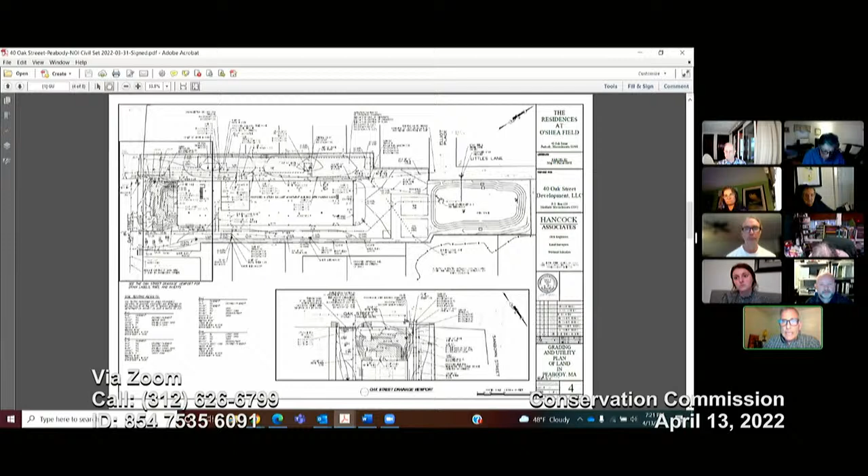Additionally, we have committed to additional flood mitigation, something to add above and beyond what we're required to do and what we previously committed to do with regards to our stormwater system. We're going to cut out this area a little bit, drop the elevation, and tie it into the municipal system so that it could be an additional relief valve—an additional amount of floodwater storage during peak events. So when I get into the stormwater, I'll explain why our system in general is improving the situation, both from the standpoint of stormwater and flood control, and this addition that's new to the project will just go a little bit beyond that.

So we do have a marked reduction in impervious surface on site, and that will assist with recharge, putting water back into the ground. We also are proposing an underground recharge system in the front, under a landscaped area, that will take our roof drainage and try to put that back into the ground also.

So let's talk a little bit about why we're here and the resource area that we trigger need for your approval, and that is bordering land subject to flooding. Again, the base flood elevation per the FEMA mapping is elevation 27.0.

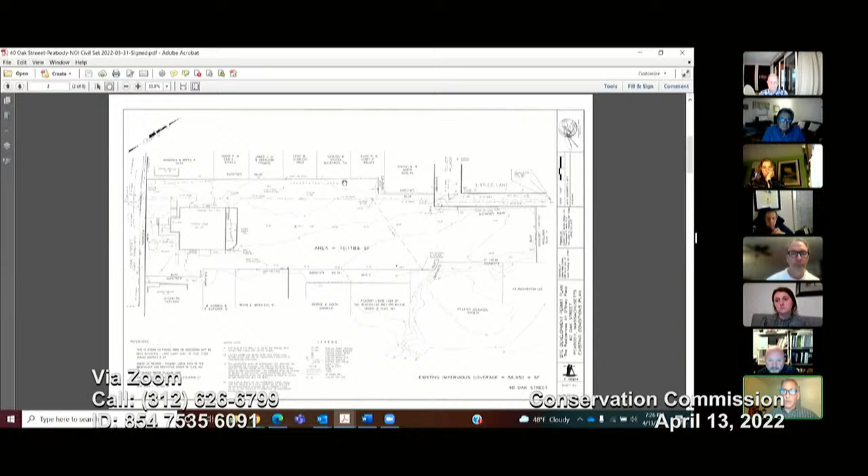So our starting point in doing our stormwater design was to take that volume that happens above the surface and put it below the surface, so that we didn't deprive the municipal system of that storage, because if we did, there'd be more problems downgradient. And on those small storm events that caused this large puddle to happen on the Elks site, that wouldn't happen on our site—we would put that underground and it wouldn't be a nuisance to our residents.

Then from there, we had to add volume to that to handle any attenuation that's required for peak flow from the site. The original piping systems, municipal piping systems and stormwater systems, weren't designed back in the day to the rigors that we're required to. We're required to look at everything up to and including the 100-year storm event.

So our system is designed to do that, so that when we're all done, the amount of water leaving the site and going into the Oak Street system is less, and what happens during these storm events is better for the area. And from the standpoint of our site, we don't have any parking lot nuisance flooding.

So we are making slight grading changes to the parking lot to develop the low points, move them around a little bit. But in total, when we look at compensatory storage incrementally as is required by the wetlands regulations, we don't have—we're not losing any storage volume.

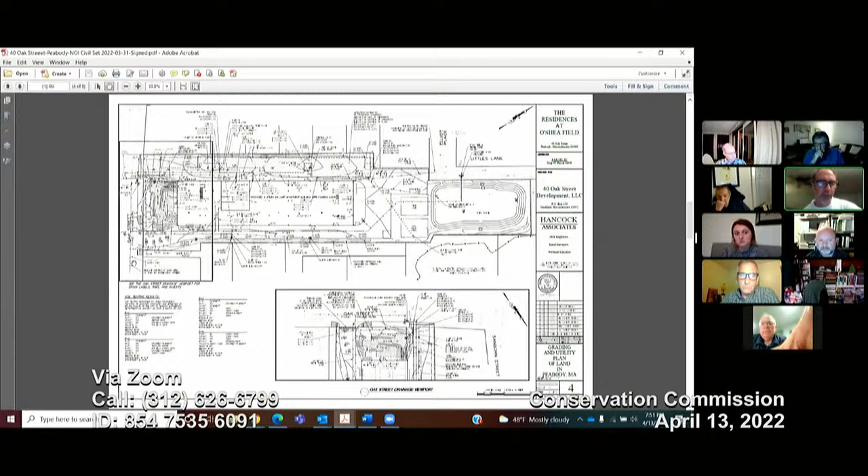Anybody else have comments? I have a couple questions. Go ahead. Just the idea—not so much flood related—but I saw in the beginning from one of your entranceways, it seemed like the most direct route, people always gonna take the straight route, and you have a path, like a switchback kind of path going back and forth because it's not that steep. Is it for handicap accessibility, Mr. Joe, or is it something else?

Yes, so these two sidewalks are under 5%, which is the handicap accessibility requirement for a sidewalk. Then this last section is an actual ADA ramp with rails, which has to be no more than 8% to get up there. And we've got a straight path that uses stairs for those that don't need that.

And you mentioned there's gonna be test holes—not so much test holes, but peak holes, or whatever you call them—within the underground chambers. Is it a sufficient amount that you can see the status of any kind of debris that gets into the stormwater chambers? Yes, there'll be monitoring wells, monitoring points, at the entry where your sediment will kind of be highest.

And when I talk about maintenance, a qualified expert firm that can do these more complex systems, they all have camera systems that you can put down the inspection ports and inspect. Direct feed to a tablet, and they're great to really understand, okay, our sediment load is such that we've got to get a vac truck in here, and the vac truck can go down that same port and suck out the sediment.

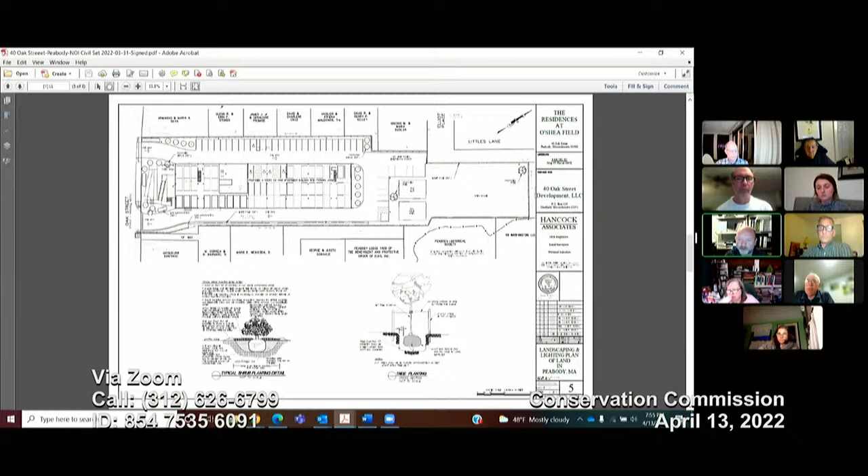So you're saying it's not very deep then? Only a couple feet. I think, Joe, the grading plan shows a slight change in grade there, right? Yeah. So it's very little, and it's a large flat surface in the middle, right? Yeah.

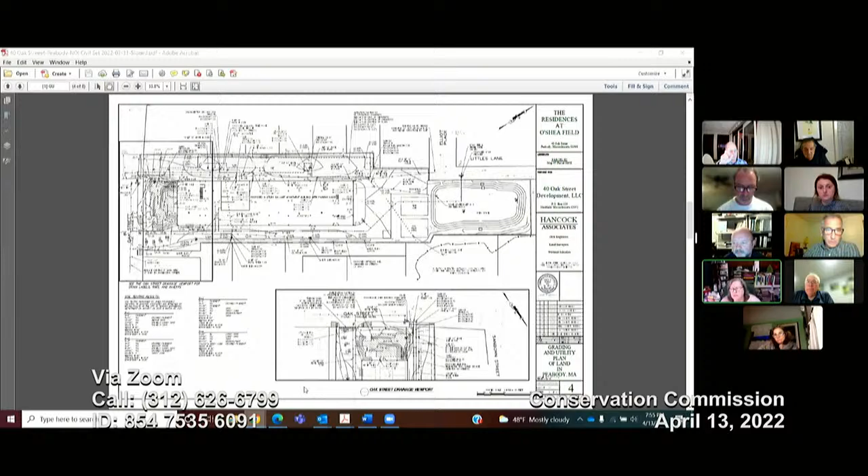So the top, is that open space pavement, and then it's going to go to ground, like grass? It's already paved, not grassy. So you're adding more, taking away that paved area. So it's this area back here that's all paved, right to the back of the property, right to Little's Lane. We'll be taking all of this pavement up.

And above the dog walk area, what does that say? Tot lot, oh, it's like a playground? Playground, yeah. I see, okay, thank you.

Just to emphasize Stuart's point, maintenance is key for that part in the rear. Stormwater needs to be maintained just as much as the underground chambers due to vegetation growing over, you always see overgrown detention basins. Again, it wants to feel like passive open space, so it'll be lawn, mowed, available for passive recreation. It's just in these huge events it could provide some additional relief to the city drainage system.

Through the chair, I have several questions. Just for housekeeping purposes, I wanted to ask, since this project has been before us many times over the years, whether you already have all your approvals for the MassHousing approvals and your comprehensive permit. Are those in hand? I remember back in March of 2017 they were going to approve and it would expire in 2 years. Do you know if those are up to date?

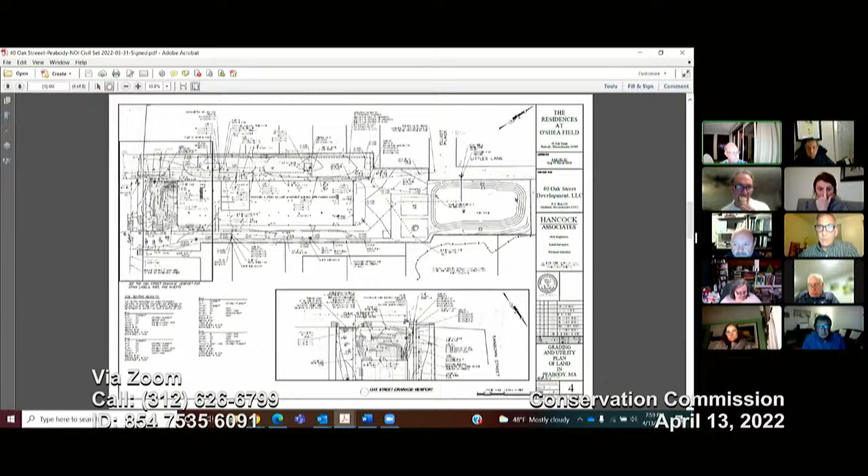Some of my questions may not be conservation related, but I need to touch upon them since the zoning portion is under appeal, assuming everything's going to go through. I have questions about how dense the site is. I look at the parking and getting around there. It's a 4-story building, and I'm wondering how a ladder truck, an emergency fire ladder truck, would be able to go around that whole building to the backside. It looks very tight, and I don't know if that's been weighed in on, but it doesn't look like a ladder truck could get through the site and come around to rescue somebody from a 4-story building from the back, but it's just a question. Since that's part of zoning, I ask because if it isn't, the site plan would have to change. I feel I have the ability to ask these questions, so I have some concerns about that, and this project.

Mr. Rizzo, did we lose Joe Piznola? Did we lose him? Yes. Yeah, we lost him. He would answer yes if he can come back.

That was Vice Chair, that was taken into consideration, there were plans with the fire trucks, and that was with the city engineer Will Paulitz who did a whole analysis and reviewed that as well, as part of the whole ZBA process. So that was done there. Okay, all right.

You've been before us many times, different levels of design, trying to use up as much space as possible in the property, knowing that this is a tough site. The downtown area, the flooding, there's such a history there. It seems like quite a bit of discussion was about picking the building up and designing for the 100-year storm, and talk about rescuing people who live here and having the fire department come down with ladder trucks to rescue them on a 100-year flood.

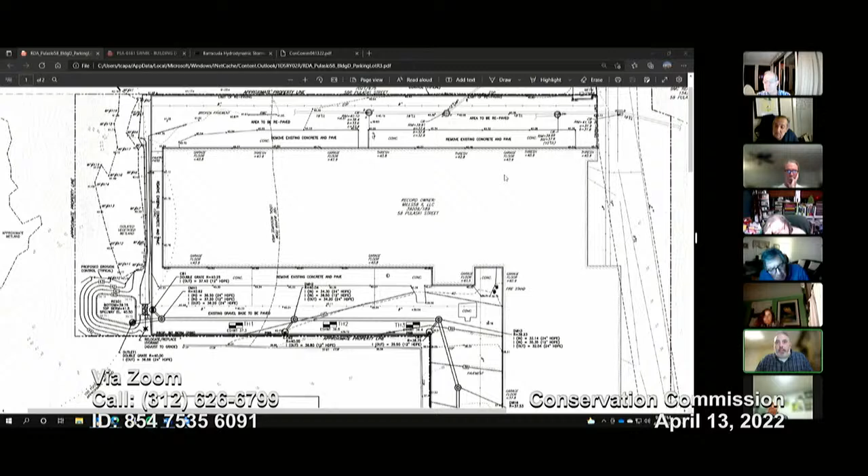It would actually be somewhat of an enhancement to this isolated wetland. The 100-foot buffer zone line is in this area here, so the only work going on in the 100-foot buffer is just this regrading and revegetation of this area. As I said, this is something we're undertaking to solve an existing problem that is under no fault of our own, and the requirements from Will are pretty minor.

To perform the test pits, again, I think that could be conditioned. The as-built could be conditioned if the board was so inclined. And the fact that we're close to this isolated wetland, it is only local's jurisdiction, and we're actually enhancing and allowing it to have a functioning relief to accept this drainage and bring it into the system that it goes to currently.

Just a clerical question here: we are probably going to have to issue a positive determination of applicability and then recommend an NOI. That's correct. So I'd like to make that motion then. Go ahead.

Is there anybody in the audience that wants to speak before we make a motion? Lucia, anybody there? You guys can see too, but I do not see any hands. Okay. So do we want to make the motion for the positive determination tonight?

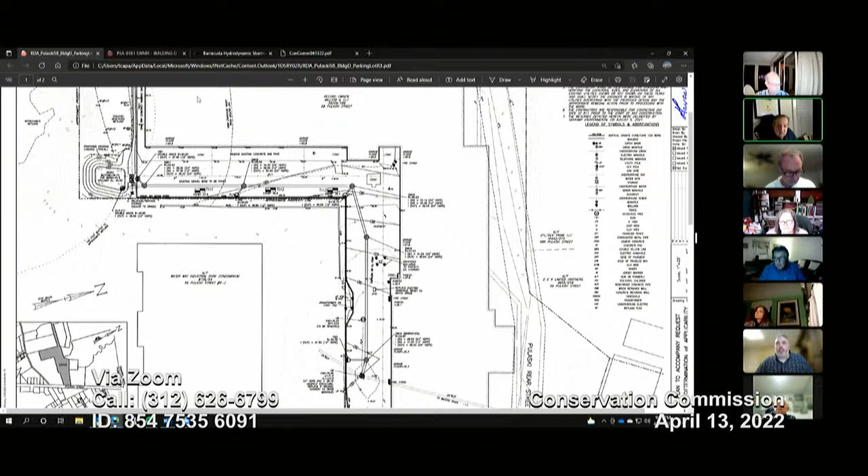Did I get that right, that there were 2 no votes, correct? Vivaldi and Comac? That's correct. All right. Thank you again. Thank you.

Item number 10, it's a discussion item regarding 8 Cobb Ave. Is Jack here? No, he hasn't, and even if he was here, he didn't submit anything to me. I believe he wants to be at the meeting next month, so I'll just leave him on the agenda and hopefully he gets me something soon, or I'll chat with him offline.

I'm just hesitant. The reason why I asked him to come to the meeting was the last time I gave him a verbal, he went way beyond what I told him, and it started a big ordeal in the neighborhood where everyone was calling me, complaining, and he was telling them that I told him he could do it. Then it was my word against his. So I wanted it to be transparent so everyone could know what happened, and I'm not playing favorites. All right, so we're gonna just continue it then?

I don't even think you have to continue it. You can just leave it on the agenda, you don't even have to read it. It's just a discussion item. Okay, moving on, enforcement orders.

Can I ask you a question? Regarding the emergency cert, did we want to take that first? It could be like a 5-minute conversation. This poor man has been through a lot the last few weeks, so if that would be amazing. I didn't want to say anything because there's a lot of people waiting for the country club, but I know Mr. Kapler would be beyond words if you guys could just ratify this quickly. He has an LSP hired.

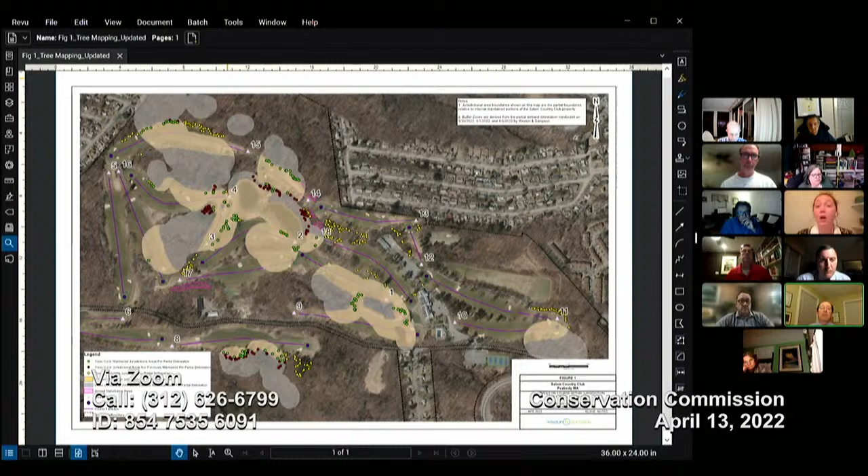So if the members in the commission and the public, we gave some preliminary data before. Now these numbers are revised based on the partial delineation of resource area boundaries that Devin and her crew have done. The total number didn't change. It's still 683. 450 of the trees that were cut are outside of the wetland jurisdictional areas.

233 are within jurisdictional areas, again, almost entirely buffer zones. Of those, 139 are in areas of the course that are maintained - that's what I was talking about in responding to Commissioner Athas's comment. And 94 have been determined to be in parts of the course that are not regularly maintained.

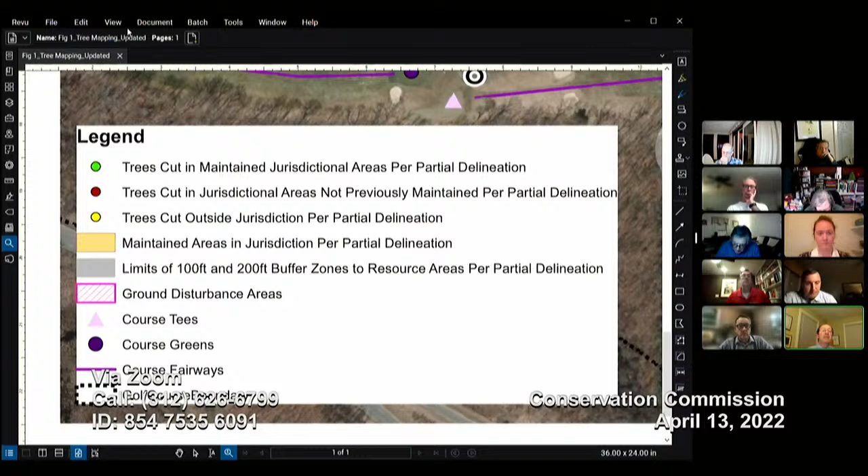Three colors are used for the trees that were cut. The yellow dots are trees outside those limits based on the delineation. The green dots are trees in maintained areas of the course, and the red dots are the 94 we just looked at on that table - trees in parts of the course that are in jurisdiction but have not been previously maintained.

So why don't we start, Devin, by focusing on the top left - that's the 15th hole that folks on the site walk may remember, the outside boundary to the north. Let's see, Devin, if you could pull that - yeah. So again, the gray areas, you can see in the middle, if your cursor can move, Devin, to show the stream that crosses that fairway and daylights, which creates the limits of the buffer zone from that.

And again, the yellow dots are outside of the buffer zones, the green dots are in the buffer zone in maintained areas, and the red dots are trees outside the boundary of the area that had been previously maintained. That's reflected throughout this figure, so we could speak to any particular area you wanted to talk about.

Devin, if you could actually pull the image down to that part near the 3rd hole, where there was some - yeah, right there. So if the commission members remember, and Lucia, you remember from the site walk, there was an area to the left there where those red dots are, where there was still some branch debris, small branch debris left in place after your initial site visit in January, when you issued the cease and desist and told the course not to proceed with any additional activity of any kind.

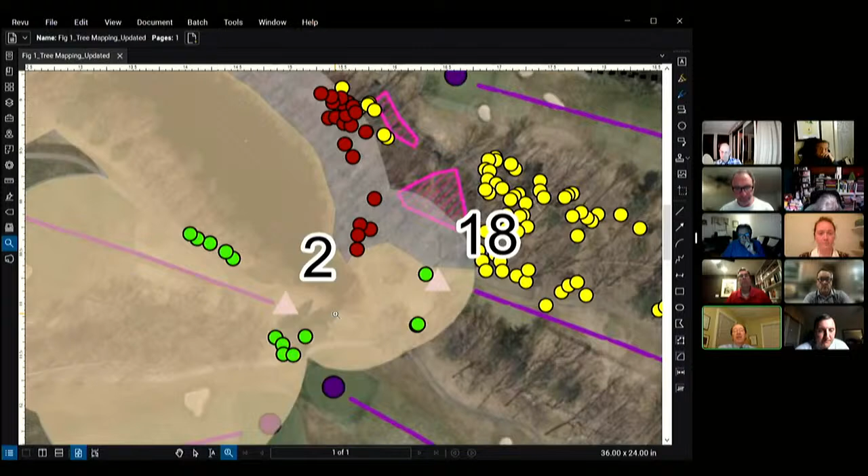So the final comment is that in developing a restoration plan, it's really an open question we want to discuss as to the premise of replacing trees on the golf course or coming up with some other appropriate mitigation.

Obviously, the objective of the work that was done was to remove trees along the edges of the fairways that were creating shadow and other problems for parts of the course not getting enough air and light, which would require the superintendent to use other methods—like applying more fertilizer—that would be counterproductive if you can actually get the grass to grow and remain dry with less shading and less debris from the trees.

So planting new trees would be going in the other direction, creating a situation that would over time require further maintenance.

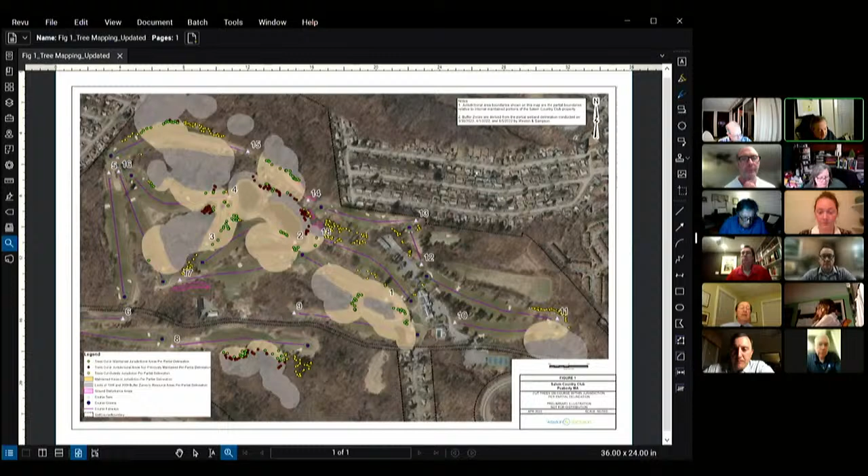Okay, what time? 9 or 10 o'clock a.m.? Say it again? 9 o'clock, 10 a.m.? I was looking for 9, but 10's okay by me.

That work for you, Bruce? Can the majority of the group meet on April 25th? I can't meet, I gotta work. I'm trying to look at my calendar. After 10 a.m. I'm free.

All right Chair, while everyone's tentatively looking at their calendars, I would request for my file, I will need one set of full plans and then whatever reduced copies for the site walk you're planning to submit, as well as the wetlands report and all the field data sheets.

If I can add one thing, the reason we're closed is to have our parking lot resealed. So I'll just have to communicate with Lucia on where we'll park, and then we'll walk to the golf course. It won't be very far, either the tennis courts or my maintenance building. But just so everybody knows beforehand.

Devin, do you have the field data available already for the delineation of the segments you delineated? They're currently being typed up this week.

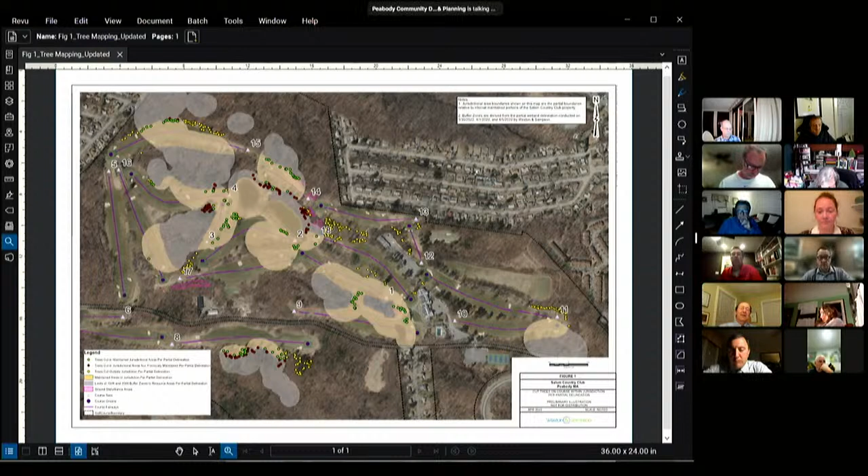So let's be on the same page as to the process we'll follow, so there's no confusion. I never invited the press. As you remember, we had a conversation right before we met there. Right now, this is actually a public notice of the site visit saying we're going to meet April 25th at 10 a.m. So I just want to move on, but I'm doing what I'm being told to do by my superiors, and that's it. Yes, we're fine with the public being aware that there's a site walk. That's different than having the site walk treated as a public meeting, which it sounds like we agree it is not.

What we will do before the 25th - today is the 13th. It might not be Friday, and I presume your offices are closed Monday, but probably Tuesday the 19th or Wednesday the 20th, no later than the 20th, you will have the maps we just spoke about and the wetland delineation forms. However many copies you want, Lucia - you have 7 members, pick a number. Well, the problem is if you give me copies for everyone, now you're putting it on me to make sure it gets out to them on time. And if you give it to me on Wednesday and I don't have time until perhaps Thursday, they're not going to get it on time for a site visit on the 25th.

Barry, can I suggest that you have them delivered to our homes? That's what I was wondering. Is that how you normally would appreciate it being done? Well, then we know it's done. Yeah, if that's the preferable approach. Well, it beats the mail. Certainly more reliable. You can communicate with Lucia, get the addresses, and deliver them before the 20th. That's what I was going to say. I'm happy to take down the addresses as long as you folks are comfortable letting me know what they are. I can get them from Lucia, and we will make sure copies are delivered to you by at least the 20th. Okay, I'm happy with that. Good.

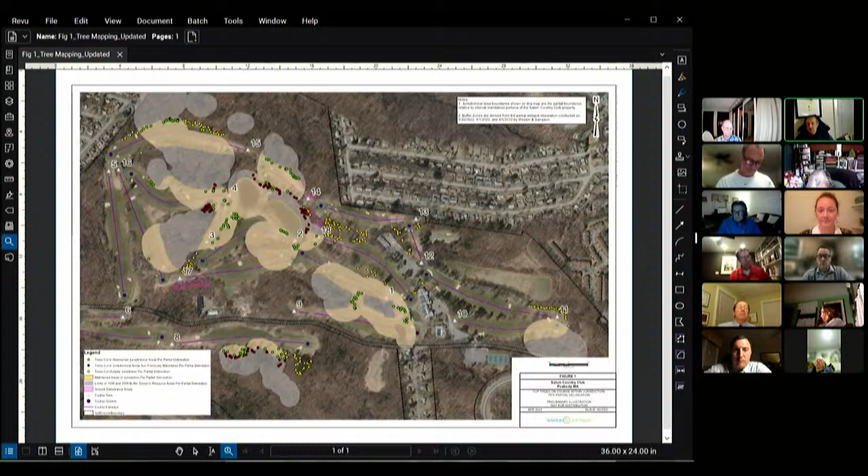Yeah, it's great. Look, I want you guys to be part of the solution. I don't want you to do this again. I don't want to have to come back and keep saying you didn't tell us what you're doing. Just tell us what you're doing all the time. Well, it ain't a bad thing.

One thing in the long term, I think the club is looking to go through a process of maybe a determination of applicability that creates fixed no-disturb zones on the course, following the approach in your local ordinance - the presumed no-disturb zone - and we can maybe delimit areas on the course that are no-disturb, and then areas that are maintainable. That's probably - and then you, Mr. Chairman, made the point of having some kind of frequent inspections to report on how that's being met. But that probably is the long-term approach, the best way to do it once we're through this enforcement stage.

Yeah, and I agree, defining what's maintainable - trees to be maintained within resource areas, you got to define what maintain means. You got a limb, a dead branch, a limb or branch or two - not cut down and not grind the stumps. That's not maintaining a tree, that's cutting down a tree. There's a difference. So we need a better definition of what maintain means.